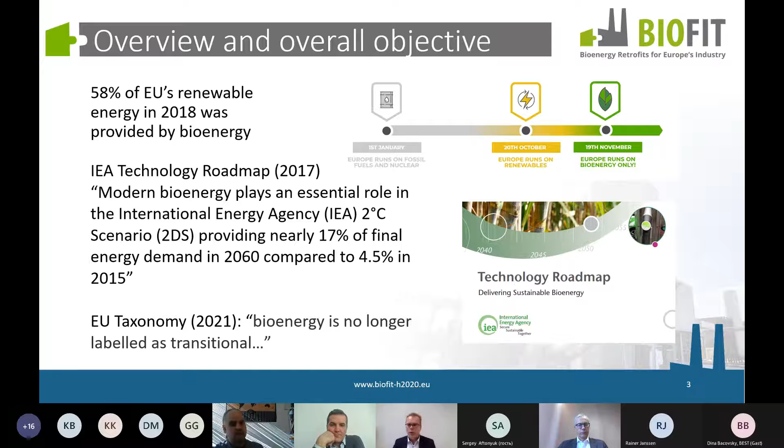Bioenergy retrofitting, the subject of the project, that is a relatively easy way to replace fossil fuels or outdated renewable technologies. And it is, of course, easier often than building greenfield plants, because you can keep part of your plant and you have shorter lead times, lower capital costs, faster implementation, less production time loss, and lower risks.

So our overall objective is to facilitate the introduction of bioenergy retrofitting in five exemplary industries: first generation biofuels, pulp and paper, fossil refineries, fossil-fired power, and combined heat and power. And you will see this division back in our industry sessions. Here we have one on each sector, with the exception of fossil-fired power and combined heat and power, because it turned out that it was more or less very similar. So we combined that one.

The project is nearing its end. We had a 3-year project where we worked together with 14 partners on the facilitation of the bioenergy retrofitting. And you see we had a quite good division across the various European countries.

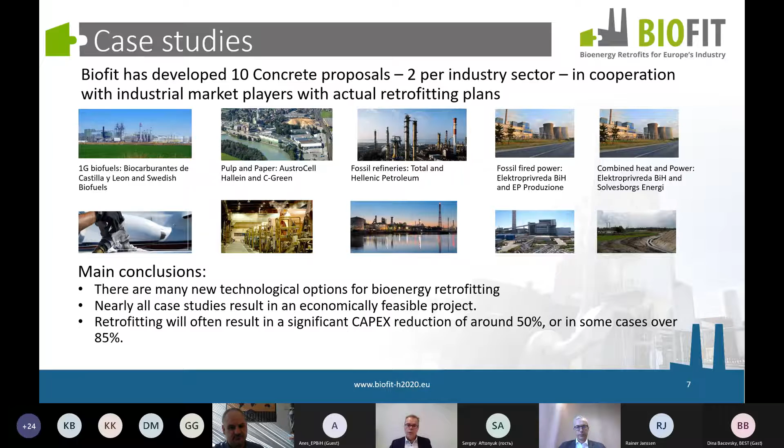Save for the overall conclusions: what we see is that there is really a very big, wide variety of technological options for bioenergy retrofitting, making a spectrum of high-value products in a number of ways, which are often really also quite economically feasible and are really actually implemented. Nearly all the case studies show that you can economically feasibly retrofit, and also that it results in a significant capital expenditure reduction of around 50%, sometimes higher. So you will see these overall conclusions reflected in the industry sessions.

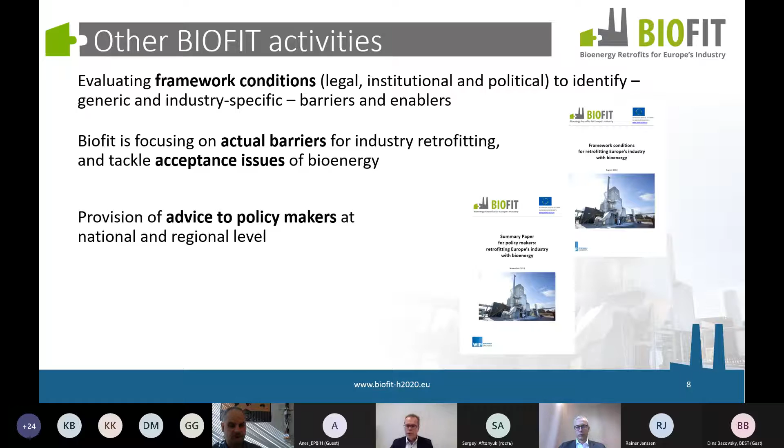We've done other things. We've looked at the framework conditions, looking at actual barriers. We also looked at acceptance of bioenergy, which is an issue which we as industry have to confront, and we will continue to confront it. And of course, we provide advice to policymakers. We will have on Thursday a policy breakfast where we give our policy advice, and we hope to also get input from you all on what it is, so that everybody can learn from that.

Of course, we have supported informed, facilitated dialogues with industry in various ways.

With respect to acceptance, we did a nice survey of 3,200 members of the public in 4 countries. One of the highlights, which I hope comes back in the final conference, was that public acceptance of bioenergy was quite high in all 4 countries. On a scale of 1 to 6, it was between 5 and 6, with not much difference between the countries. It's almost all quite good.

But if you're talking about the companies behind it, acceptance is quite low. So here you see directly that industry has something to do. There is very fertile ground for public acceptance, but it comes down to how we communicate about the technology options and what we can do with our technologies.

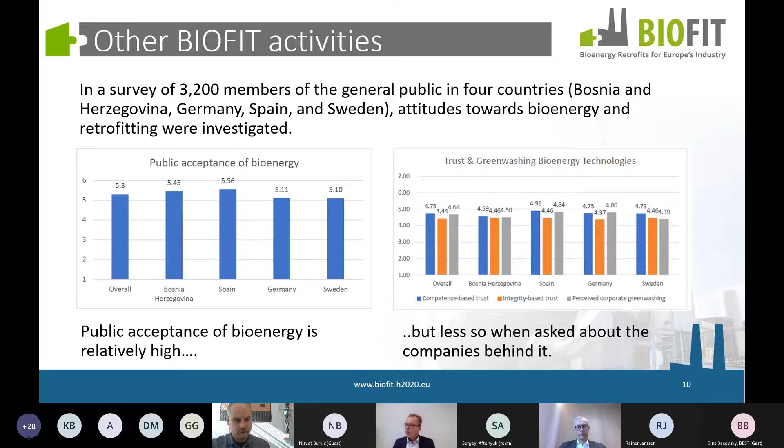This ends my presentation. Today we will go to 2 industry sessions. One is about fossil-fired power and CHP, which will be moderated by Manolis Karampinis of CERTH. I'll give him the word in a few minutes. After that, around 3:15, we will have the session on bioenergy retrofitting in fossil refineries, where I hope to see you back again.

This concludes my introduction. I wish you all a very good conference, and I hope it will be useful and a good learning experience for everybody. Thank you very much.

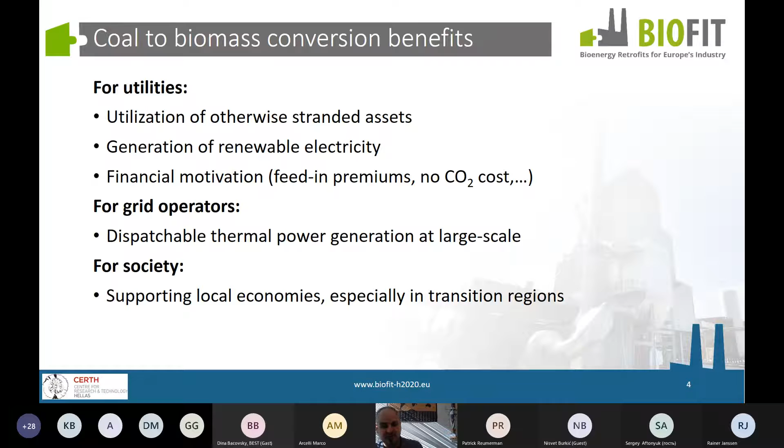When it comes to technology, I don't have a lot of time to go into detail, but at the last stage of the project we mainly found three groups. The first is retention of the typical technology used in large-scale coal combustion, pulverized fuel technology. This has been applied in boilers with a fuel input of up to 1,000 megawatts or even more, with some modifications required.

One of the main modifications in most systems is changing the milling system to switch from coal to a biomass fuel that behaves differently. Sometimes you have to install new burners, and you may need other adaptations in the flue gas cleaning equipment or combustion control. You also have to take care of biomass handling and storage issues.

The fuel used in these conversions is primarily wood pellets, due to large-scale supply issues. When you require biomass volumes for such a big power plant, you need a high energy density fuel, and at the moment this can only be provided by the wood pellet market. There are now several references of plants that have been converted.

Another option that has attracted a lot of attention is conversion to thermally treated wood pellets. Essentially, you have a fuel that is biogenic in origin but pre-treated to resemble coal, so there can be substitution with minimum modifications required.

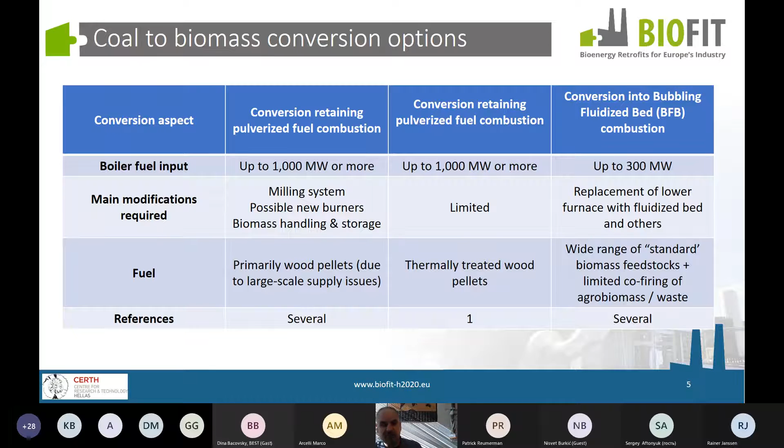The advantage is that you can use a wide range of local and traditional biomass feedstocks, such as forest residues. Perhaps you can also use a certain amount of agrobiomass or waste with minimal processing, so it's a good option for shorter supply chains. There are again several references, but there are many factors a utility has to consider before embarking on a conversion.

I don't have time to go into a lot of detail, but the on-site infrastructure has to be assessed, fuel sourcing options need to be considered, the logistics infrastructure for bringing fuel to the boiler house has to be considered, as well as health and safety aspects and the support scheme that will allow the conversion to take place.

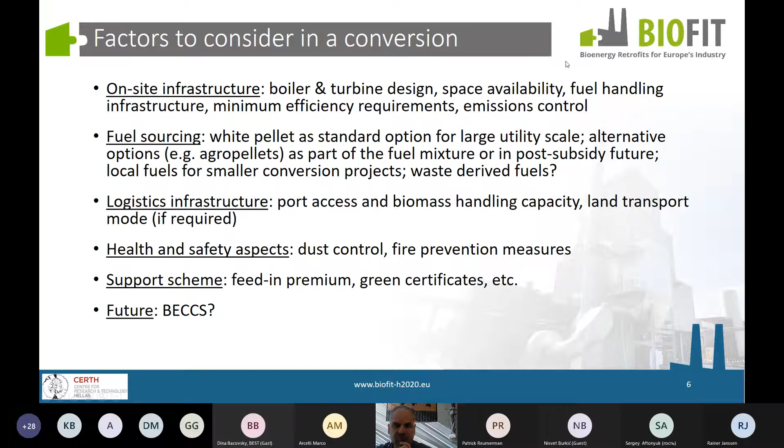In the future, there are other possibilities such as biomass carbon capture and storage that might allow a longer-term perspective for these technologies. At the moment, I think there are a little over 4 gigawatts of active wood pellet conversion projects in Europe.

Most of these projects are in very specific countries. The UK is the clear leader with projects like Drax and Lynemouth, but there is also some capacity in Belgium, Denmark, and the Netherlands, and some smaller ones in Sweden. If you look at combined statistics, it can be estimated that at the EU27 level, about 5% of biopower supply is coming from such converted plants.

It's a little different story in the UK, where about 50% of the bioenergy supply is provided by those converted power plants. Most of these conversions took place around the early 2010s or so, up to 2019, more or less. Some of them have been active for quite a few years already, and most have a quite interesting history, which we don't have time to go into, but for many of them, the biomass use did not happen from 0 to 100% at once, but gradually.

Some years ago, back in November 2019, we had an industry forum in the BioFit project about repowering coal plants to biomass. It was at the time, as Patrick said, ancient history, when we were still allowed to travel. At that meeting, we had identified through a preliminary reading of the draft National Energy Climate Plans that by 2030, more than 80 gigawatts of coal plants were to be decommissioned in Europe, probably even more now with the more advanced coal phase-outs. At the time, there were many discussions about conversion projects considered in Italy, Ireland, Greece, Spain, and probably elsewhere. But since that time, almost nothing happened in developments.

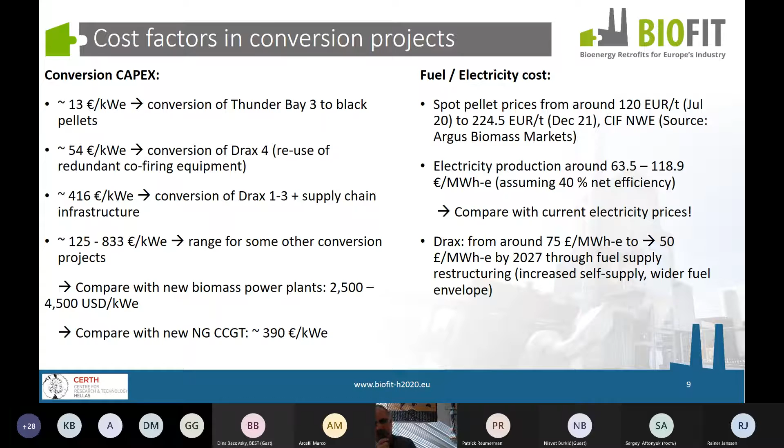And of course, there are different initiatives. For example, Drax has a structural initiative to reduce its electricity cost to up to £50 per megawatt hour by 2027 through increased self-supply, broadening the fuel envelope, and so on. So there are several developments here that might push costs down even lower.

When it comes to the BioFit project, we have been working on 3 case studies on coal to biomass conversions, and they were actually quite interesting and variable sets.

Two of the case studies were located in Bosnia, a country that is still outside of the main European Union policy framework, but affected by it, as it aspires to become a member. And one is in Italy, in Sardinia especially, where it was very interesting to see how a coal to biomass conversion could fit into the framework of an island energy system.

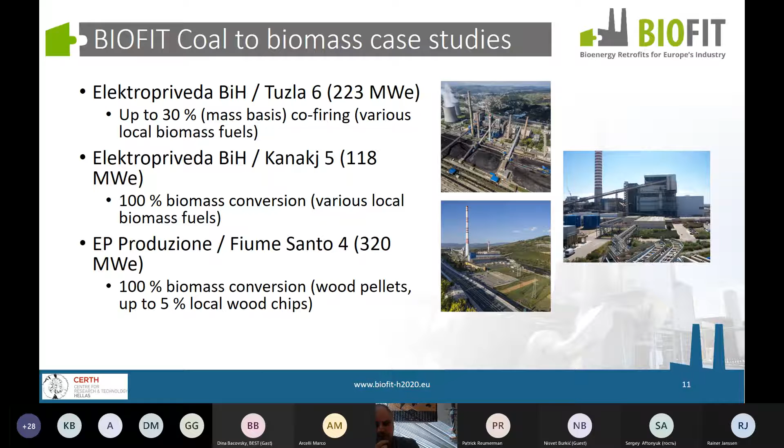I won't say more about this because the case study companies will give their own insights in their presentations. So I will stop here and resume at the end of the session with some policy recommendations we have drafted in the project.

And then I will give the floor to Gilles Gauthier from Bioenergy Europe. He is the market development director, and one of the main persons, I think, to be discussing solid biomass utilization in the organization. So, Gilles, the floor is yours.

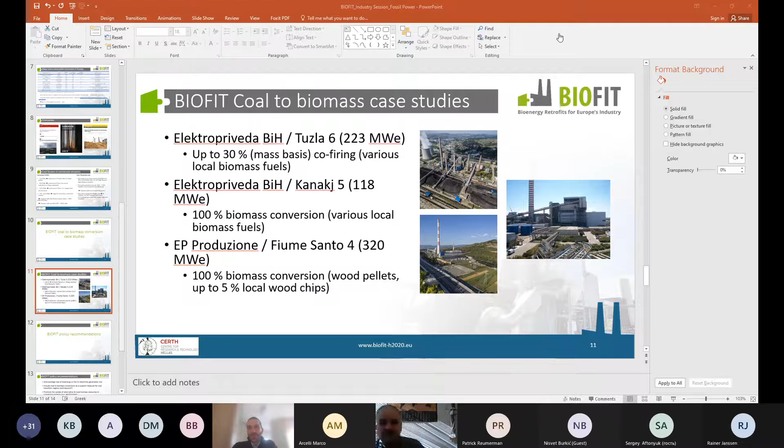Yes, okay, very good. So again, good afternoon, everyone. Indeed, I wish that we would have had the opportunity to meet in person and not remotely like this, but I guess we have to go through this additional wave, hopefully the last one, and I hope that all of you are basically healthy at your own place.

So indeed, my name is Gilles Gauthier. I will give the first part of this presentation, and then my colleague, Daniel Reinemann, will take over for the policy part. So I will take care on my side about, let's say, the market aspects.

So first of all, a few words about Bioenergy Europe. I'll be very quick on that because I know time is limited. We are a team of about 30 persons based in Brussels, and our role is to protect the interests of the European bioenergy sector.

We have existed for more than 30 years now, and we are made of 185 members, which might seem a lot for you, but given all the challenges, including the one that Manolis has spotted with all that controversy that exists against biomass, there is definitely a need for us to get together and to be stronger and stronger.

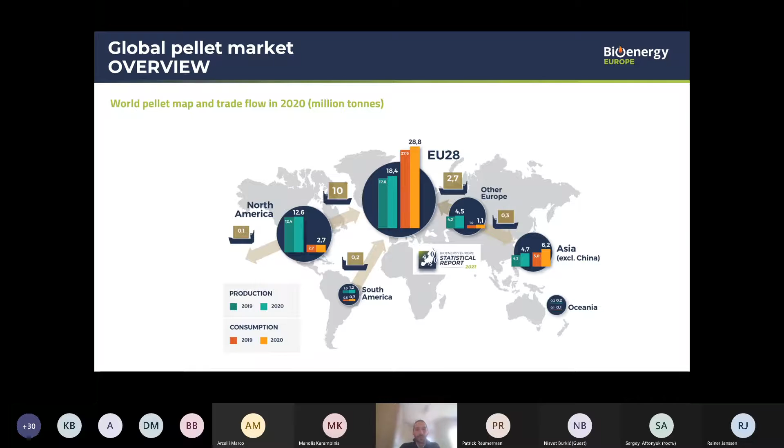So maybe a few words about the UK. Obviously, thanks to Drax, UK is definitely the biggest user. There are some more units coming online, at least one, so this number will even be higher in the future. For the Netherlands, I guess you recall that they used to use pellets, then it stopped for some time because of a stoppage of political support for biomass usage. It has resumed a few years ago and is now continuing to increase, with a limit that will be around 1 million tons in the future.

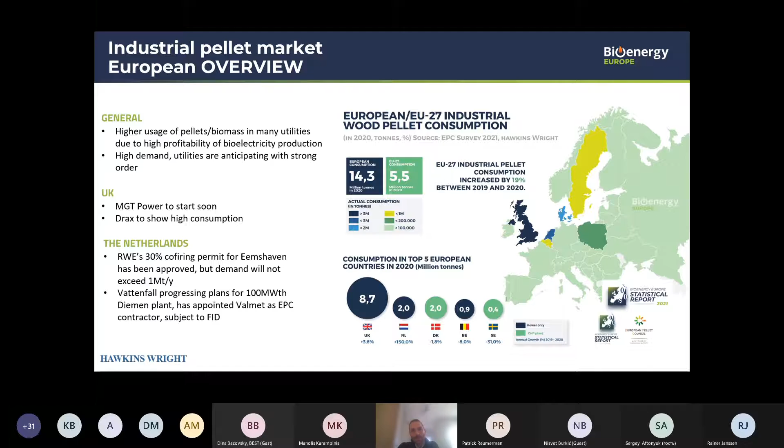And very quickly on the market situation, I have to be very quick, sorry about that. The market was rather quiet in early 2021. And then later in 2021, there has been a very big consumption of industrial pellets from the industrial users for many reasons. One of them being that the electricity price was rather high, making it profitable to run on biomass. So there was an increasing use of wood pellets for power production in most of the utilities, which has created a significant tightening of the market.

So there is now a complete shift in a few months between the situation we had until mid-21 and the situation we have now, where the market is rather tight, and it is definitely reflecting on the price of the biomass.

Just a message to the organizer. I hope it is okay that I would exceed my speaking time by about 2-3 minutes. If it is not the case, let me know and I will try to shorten that.

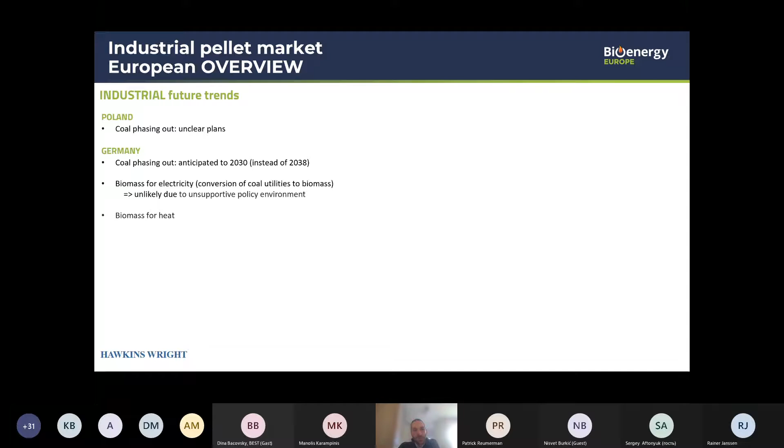So if we look now to the future, we can see two countries where there might be an increase of the usage of wood pellets or woody biomass for heat and electricity production. One of them is Poland, because they've committed to phase out the usage of coal, but their plans are unclear at the moment to me. But Germany is much more likely to use industrial biomass in the future, not in conversion of power plants, from what I understood from different experts, including Hawkins Wright, because there is no favorable policy framework for a conversion to biomass for electricity production, but there is one for biomass for heat.

So I would like to say very quickly a few words about the wood chips market. Part of this information is coming from our member Cleantech Trade. The situation is rather similar to the situation of wood pellets. The first semester of 2021 was very quiet. There was a lot of supply and a reasonable demand. So there was an oversupply of wood chips and rather depressed prices. And within a few months, there was a complete shift.

Indeed, the supply was not as important as in the past, and the demand was much higher, including for the reason I've already mentioned for wood pellets, in the sense that the electricity price was rather high, allowing a larger use of biomass. On top of that, the CO2 price is definitely increasing, which is making it profitable as well. So we have a rather important shift on the market, which is bringing serious tension on the supply, which is then reflecting on the price, which is nearly my last slide.

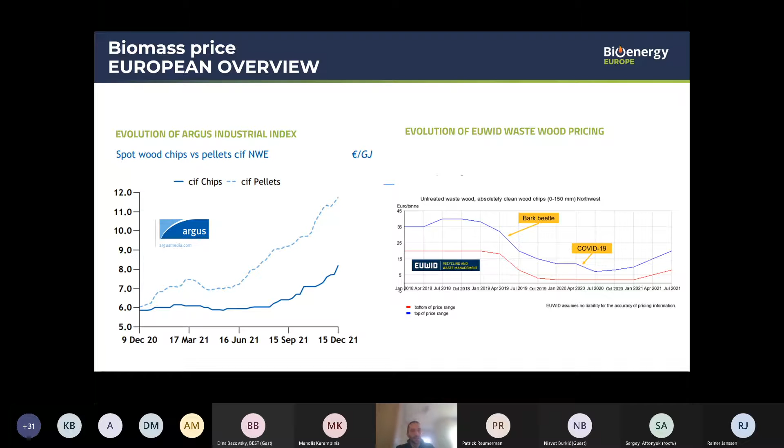So very similar trend to the clean wood pellets and clean wood chips. I would like to conclude with one thing: even though you've got some fluctuation on the biomass price, and unfortunately an increase these days, if you compare it with the fluctuation you can witness on fossil fuels, being natural gas, oil, or electricity, you see that we are much more stable and we will remain much cheaper. I will leave you with this expression from one of the speakers I met recently from EEX. He was saying that wood pellets are basically the stable anchor in the energy complex. So that's the kind of message I like us to put forward. We are definitely cheaper than fossil fuels, and we show also a great stability of price over time, even if at the moment we've got, let's say, a bit of an increase in the price of our biomass for the moment. So with that, sorry for having been a bit longer than expected.

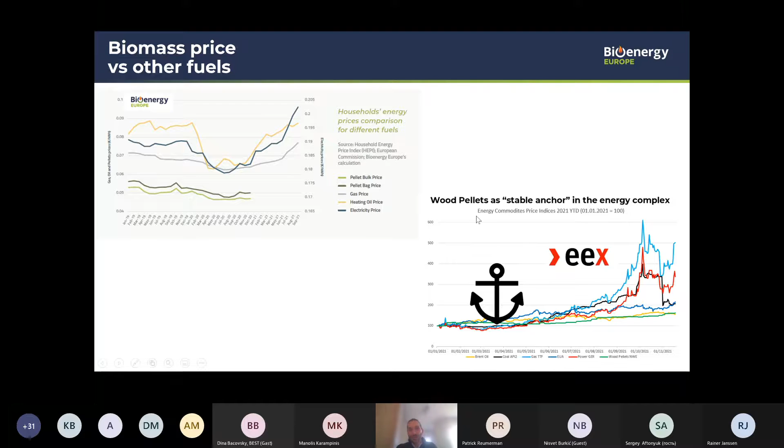So I'm going to go through and present an overview of what the EU legislation is that's impacting the rules for bioenergy facilities today. And then after that, we'll take a quick look at what we can expect looking forward to RED 3, what the legislative framework is going to look like after the Fit for 55 package in 2024, and then I will discuss a little bit on what are some of our views and concerns looking forward.

So looking first at the criteria in the Renewable Energy Directive. These criteria are very important for a number of reasons. In order for biomass to be counting towards renewable energy targets, for sectoral sub-targets, in order for it to receive any kind of public financial support, and to maintain its zero rating in the emission trading scheme, it needs to adhere to all of these criteria.

So these are the three criteria that biomass is required to meet. There are certain sustainability criteria regarding the harvesting and the impact on soil quality to make sure that you're not having negative impacts on the environment. There are also requirements for land use change in forestry, the LULUCF requirements. This is ensuring that for the biomass that's being harvested and used, there is indeed replanting and regrowth happening to ensure that it's remaining carbon neutral, and that you have this regeneration or even growth in the carbon stocks to make sure this is a sustainable solution.

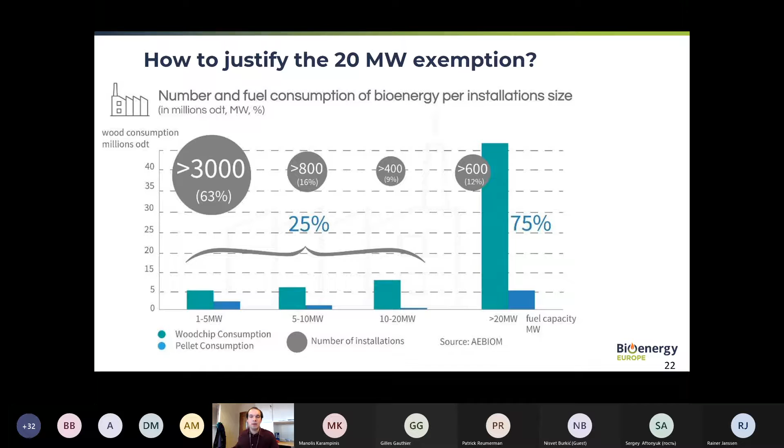Looking forward and talking about the end use criteria, which I think is going to be important for quite a lot of the people listening today, here we're talking about the greenhouse gas emission saving criteria. These criteria are different for operations starting at different times. For transport fuels, the first requirement was that all installations operating prior to the 5th of October 2015 would have a greenhouse gas emission savings criteria of 50% or greater. After that date, it would be increased to 60. And then starting January 1st, 2021, it would be 65%.

For electricity, heating, and cooling producers, the first criteria came into place in 2021, establishing a savings of 70% or greater. Then all new installations going forward in 2026 will have to reach 80%, but that only applies to new installations.

When we're talking about these greenhouse gas savings values, there are two different ways to calculate this: you can either use the actual values or default values. When you calculate this, essentially what it's looking at is what kind of greenhouse gas emissions you have from the extraction or cultivation of these materials. Are you using fossil-powered equipment to do that? When you are harvesting these materials and processing them, is that being done with fossil fuels? Do you have a gas boiler drying the material to prepare it for processing?

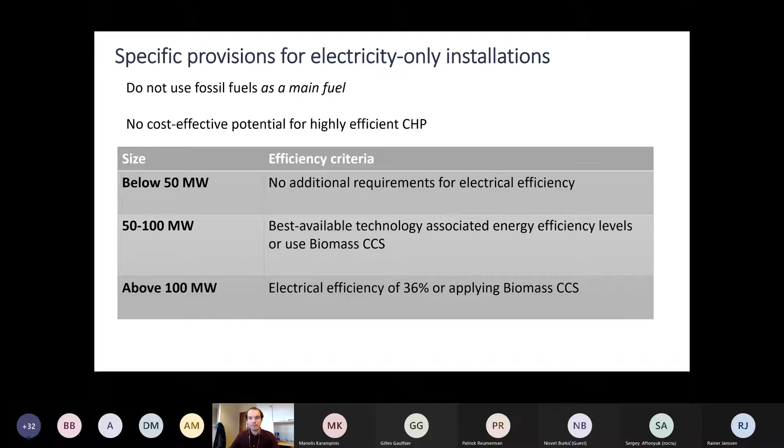So we're generally talking somewhere in the range of 32 to 38%, or the installation is also able to use biomass CCS, in which case it is considered to meet the efficiency criteria. And once you're talking about installations over 100 megawatts, there isn't just the best available technology requirement, but there actually is the electrical efficiency rate of 36 that is required for all installations, or they can also be operating with biomass CCS instead. Those are the two options that exist for them. If you go to the next slide.

However, there have been a few challenges with the implementation of RED 2. There have been quite a few implementing acts that were expected from the Commission, such as the Operational Guideline on Forest Biomass and the recognition of voluntary schemes. Unfortunately, these have both been delayed and have still not yet been released, which has resulted in an adjustment to the monitoring and reporting regulation for the emissions trading scheme.

Initially, the way it was set up is that starting from January 1st, 2022, all member states would need to be going through and demonstrating the sustainability of biomass in order for that zero rating to be maintained in the ETS, for eligibility of support, and to count towards renewable energy targets—all the things I was talking about at the start of this presentation about why the sustainability criteria are so important. However, with this adjustment from the Commission, these criteria are going to be able to be considered fulfilled for the next year, while these voluntary schemes to verify compliance are vetted and approved by the European Commission, and for these implementing acts to go forward to create the framework needed to operationalize RED 2.

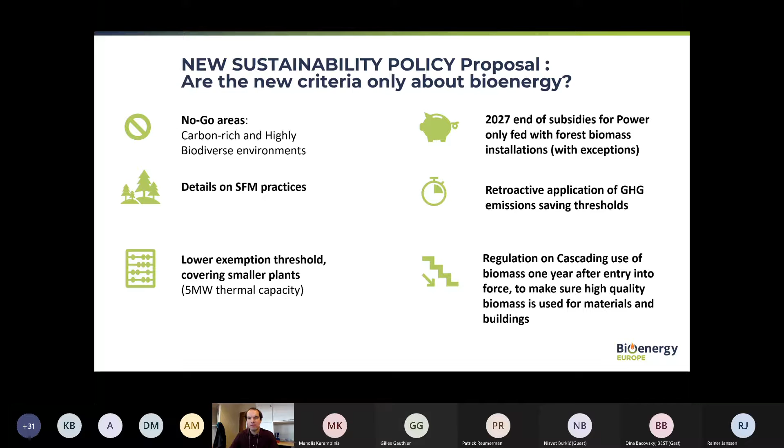So if you go to the next slide, we have a few general recommendations on a lot of these points. We think this lowering of the exemption threshold could definitely be problematic because it could increase the regulatory burden on a lot of these small actors. As I mentioned, right now we have a very effective regulation in place that operates quite efficiently, but if we were to extend it to a bunch of these other actors, that could increase compliance costs, especially given the delays we've seen from the Commission side in recognizing any of the voluntary schemes.

Additionally, on top of that, we think that the retroactivity of the proposed greenhouse gas emission saving criteria could negatively impact the sector by undermining market stability and investor confidence. This could create a framework where biomass isn't considered as secure an investment moving forward. As Manolis was talking about, there are significant capital costs at the beginning, and so we see that this could be an area that could potentially create some challenges.

And then also the institution into legislation of the cascading requirements could create a framework that ends up distorting the market by placing very strict criteria on what is able to be done and how different material needs to be processed, regardless of local factors and local conditions. So we think that those areas could cause some problems in the future.

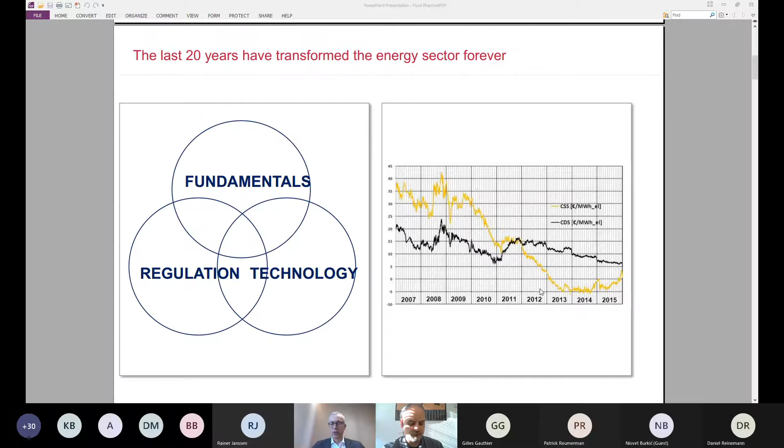If you want to move to the next slide, that actually created a lot of opportunities for newcomers like EPH. EPH is a Czech group founded early in the 2000s that basically grew through acquisitions in this new world where all the legacy utilities wanted to divest their fossil fuel assets as they were moving into more renewable generation.

Through subsequent acquisitions, first of regulated assets when everybody was going merchant looking at increasing power prices, and then from 2013-14 onward, when everybody was concerned about the dynamics of merchant power, we acquired a significant number of assets that today make us the sixth or seventh largest generator of electricity in Europe, with a business that generates about 2 billion euro in EBITDA and about 600 to 700 million of free cash flow every year.

If you want to move to the next one, as we developed this portfolio, driven by the realization that it's not that we're a dirty player like some define us simply because we acquired a lot of fossil fuel assets. Our rationale was that at that time, when everybody was saying by 2040, 40% of generation needs to be renewable, I don't think a lot of people focused on the fact that in that case still 60% had to be fossil.

And if at that time, coal and gas-fired generation was not making money, something had to change, either the regulation or the market, and that happened.

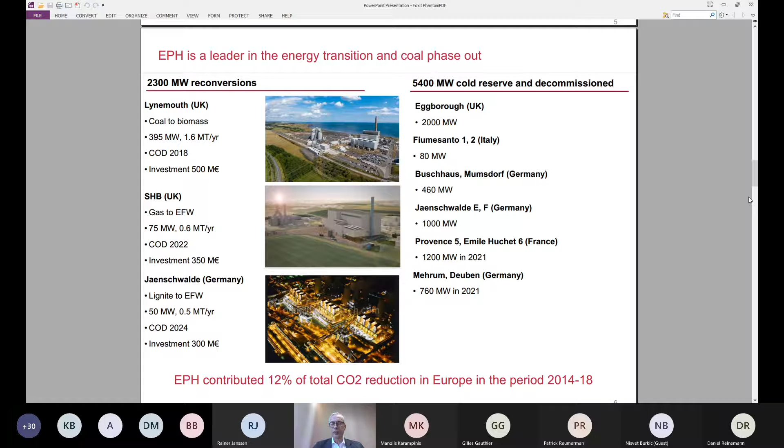So that's what we think is managing the assets responsibly in terms of decarbonization and phasing out of coal. If we can move to the next slide, this is a brief summary of what we have done so far. The first is reconversions: we are reconverting or have reconverted over 2,000 megawatt at Lynemouth, and two power plants, South Humber Bank and Jaenschwalde in Germany, that were reconverted to energy from waste. The second is over 5,000 megawatt that were put in cold reserve or decommissioned, which altogether contributed to 12% of the total CO2 reduction in Europe in the period 2014 to 2018.

On top of that, we are also investing in new renewables and converting existing plants into something more efficient. Our existing gas-fired generation is also being reconverted to higher efficiency, from the high 40s and low 50% efficiency to the current 60% and more efficiency with H-class technology. We invested over 1 billion in the last 5 years, and 1 billion will be invested in the next 3 to bring this decarbonization plan forward over the next decade.

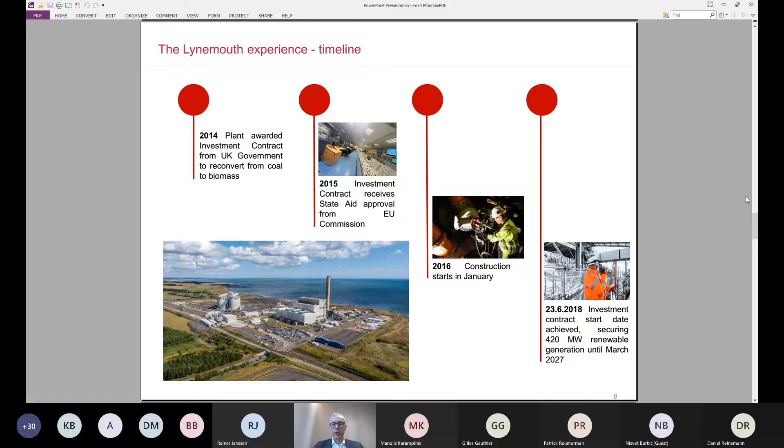Which brings us to our direct experience in biomass and reconversion, which is at the core of what Manolis was describing before. Lynemouth is the first project. It came into operation as a coal-fired plant for an aluminum smelter in 1972. In 2014, the plant was awarded an investment contract from the UK government to reconvert from coal to biomass through an extensive capex plan of over £300 million. In 2015, this investment contract received state aid approval. It took more than 2 years between regulatory and permitting to then start construction in January 2016, which was completed in just over 2 years, securing 420 megawatt gross renewable generation that will run until March 2027.

This was one of the largest Drax-type plants converted in the EU at the time and in the UK, with 420 megawatt gross and 390 net capacity exported to the grid, saving approximately 1.5 million tons of CO2 emissions compared to the previous coal operation. The investment tackled both the power plant and biomass storage capacity, at the Port of Tyne for 75,000 tons and 50,000 tons at the station, plus all the logistics of 1.8 million tons of pellets coming mainly from Canada and the USA through the direct sea and rail infrastructure network linking the port to the power station. That maintained all 150 jobs we had at the power plant before converting it.

That's another big claim we make about biomass as a secure renewable energy in the sustainable architecture the EU is developing: the fact that we can support a similar level of employment as we had with power generation from coal, as opposed to wind, solar, battery storage, or other technologies that have really low employment.

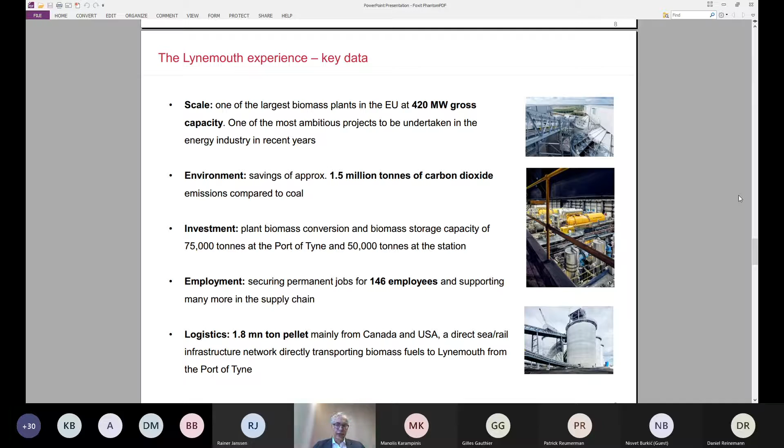If we move to the next one, we move to the other projects. Lynemouth is completed, it's running well, and we're very happy with that. So we said, why can't we replicate it in other power plants in our portfolio? The choice fell onto Fiumesanto, a 600 megawatt coal plant in Sardinia, in northern Sardinia, with a reliability must-run contract until the end of 2024, so basically 2025, and a planned coal phase-out thereafter.

So it's one of the two plants on the island where the system operator certified that there is a need for 600 megawatts of baseload capacity on the island to guarantee system reliability. So we took it responsibly and said, well, we have an idea, we would like to convert it to biomass because that's the fastest way you can convert it, between permitting and the actual physical work at the plant.

However, there is also a strong lobby to bring gas to the island. Today there is no significant gas demand, and so there is a big gas project to build a main trunk line from the north to the south, basically changing the LPG gas used today to methane. We said, of course, we can also look at that solution, but it will take longer. From a regulatory perspective, we need somebody who guarantees that by the time we do the reconversion, the gas will be there. So we think that from a regulatory standpoint, it's a little more complicated, but still doable.

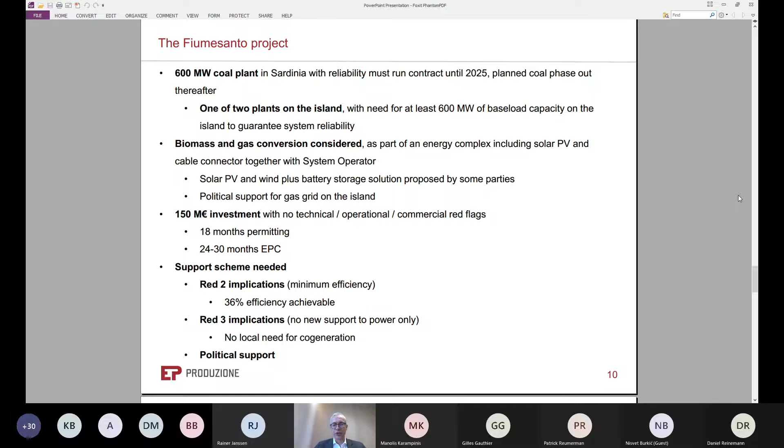And if you go to the next one, it's mainly on the fuel handling side — both the ship offloading, the coal tower, and new biomass silos and internal conveyor system that will bring it from the silos to Unit 4 of the power plant being reconverted. Altogether, from a technology standpoint, very simple activities we can do, and commercially quite simple too, because we can source the pellets from the general market.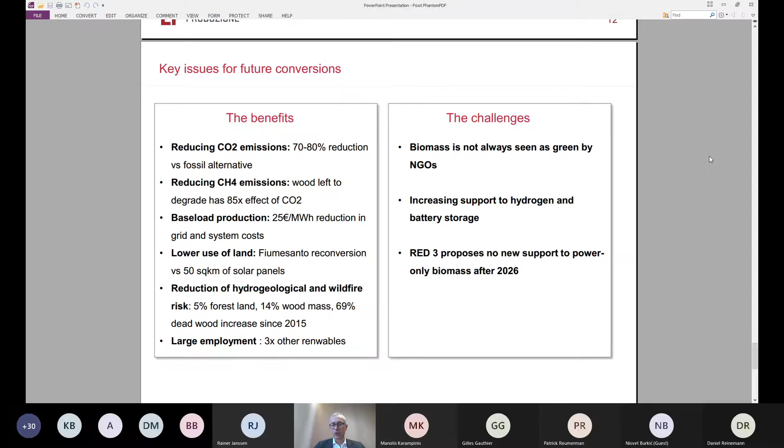And the last one is the large employment that we saw. However, the challenges were already described. Today, biomass is not always seen as green by some NGOs and some political parties. There is an increase in support to hydrogen and battery storage, which is seen as an alternative solution. And the RED III proposes no new support to power-only biomass after 2026.

So if we move to the next slide, we see the conclusion: unless we act together and convince the European Union to tweak RED III and the related local regulation to enable power-only generation, or at least to have the exclusion that if you cannot do cogeneration locally because it's warm weather or there is no industrial activity that justifies the use of cogeneration, we see that coal to biomass conversions and new biomass plants in Europe probably will not have a future in the European Union.

So I think that this is a call to everybody to speak up at the European level so that we can support this type of projects also in the future. Thank you.

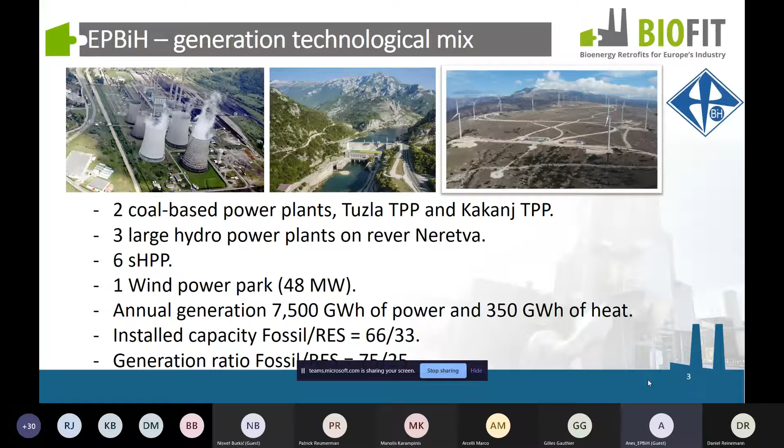Installed capacity of fossils versus renewable energy sources is at the moment two-thirds in favor of fossils. So we are in a process of energy transition to renewable energy sources.

Some key energy indicators of the company: we burn about 5 million tons of coal a year. Average net efficiency of our thermal power plants, not accounting cogeneration mode, only condensing mode, is 31. Annual CO2 emissions are 5 million tons a year. The average CO2 emission factor from our thermal power stations is 1,000 kilograms of CO2 per megawatt hour, while the average net emission rate, including renewable energy power accepted from some smaller qualified producers, is about 670 kilograms of CO2 per megawatt hour.

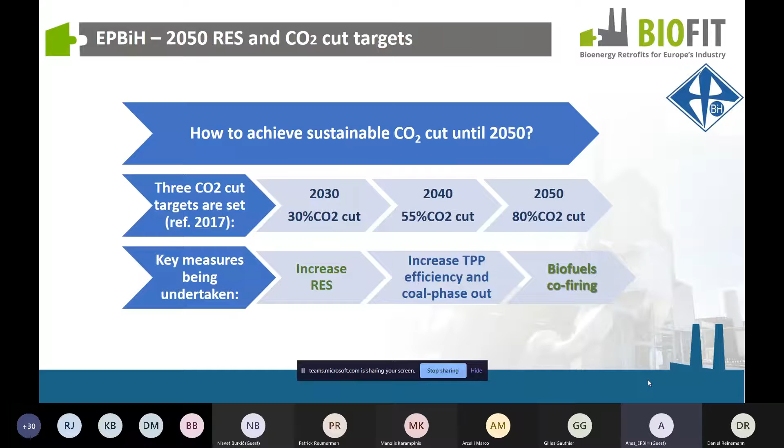Three key measures to achieve those targets: increase of renewable energy sources, increase net efficiency of our thermal power stations, and as a third pillar of the measures is biofuels use instead of coal in our power plants. So in some basic scenario, this is the transformation of our technological mix until 2050, where we can see a trend of transformation from dominant fossil production to dominant renewable energy sources until 2050.

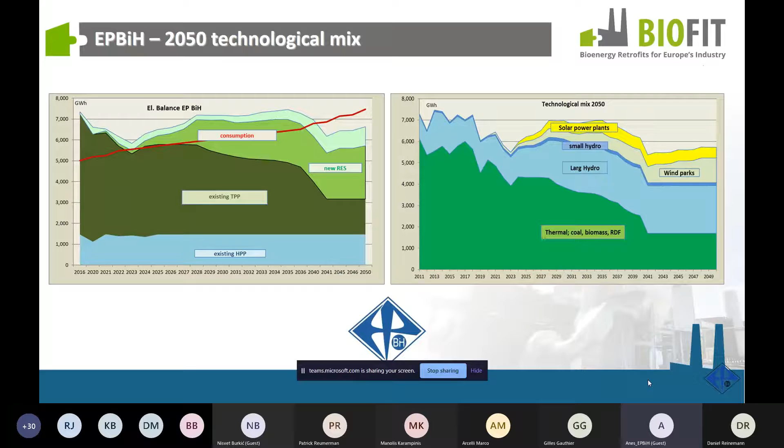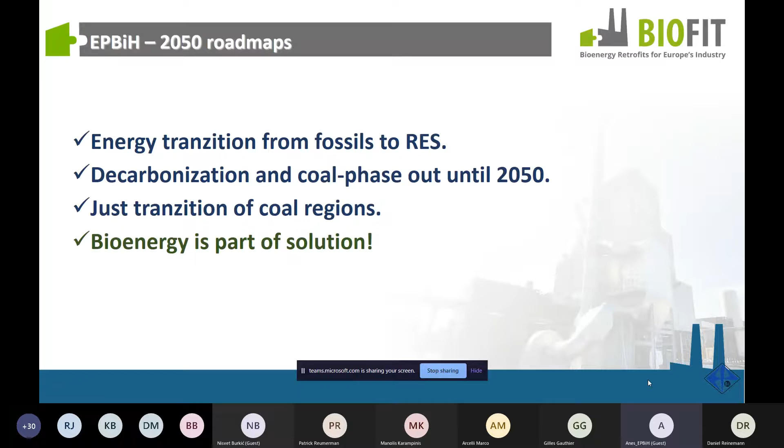So we have a program of transition of our coal regions with decreasing of people employed in the coal mines, with decreasing of coal production and supply to our power plants, and the development of some green jobs on our coal mines, which is at the moment related to the installation of photovoltaic power plants and also bioenergy crops plantations. So as our commitment, I can finish this part of the presentation: we see bioenergy as a part of the solution for decarbonization of our generation portfolio.

So I will say now something about our previous, ongoing, and future bioenergy activities. When we talk about bioenergy activities, we first need to start from the logistics and the types of biomass that are to be used in our power plants. So we started first from the waste woody biomass option. Then we continued our activities with short rotation coppice and other bioenergy crops plantations. And also recently, we started some activities on the development and implementation of waste to energy options, meaning introducing some fuels from waste in combination with other fuels for our power plants.

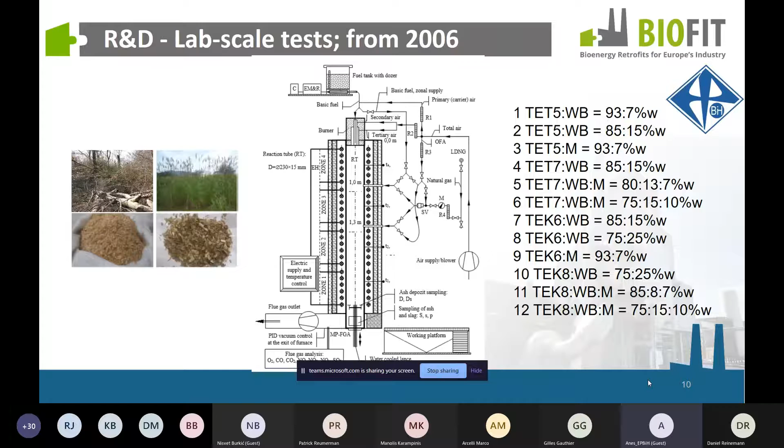We also 15 years ago started with research into possibilities of biomass co-firing in our power plants. So we investigated different combinations of our coals with different types of biomass, waste woody biomass, and also bioenergy crops in different ratios. We first started that on lab scale facilities, and then 5 years later we started with the first biomass co-firing trial run in our large power plant Kakanj, where we started to use 5 to 7% of waste woody biomass in combination with the coal without any adaptation of the equipment on the unit.

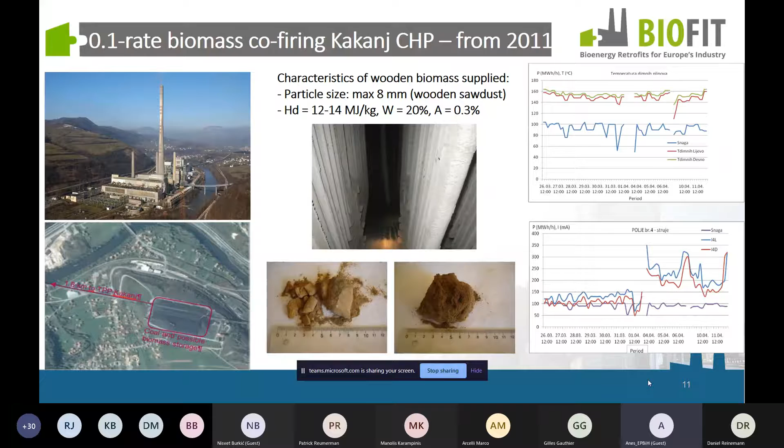So it is actually simple mixing of the waste woody biomass, chips and sawdust, with the coal on the coal depot, and then transportation by belt conveyors to the coal bunkers and introducing through the milling burner line into the boiler. We noticed a list of synergy effects of use of this type of biomass in combination with the coal. The coal that we use is a low-rank coal, so wooden biomass even improves the characteristics of the fuel in our power plant.

Then in 2020, last year, after detailed analysis, we started with the plantation of bioenergy crops on former land of some of our coal mines. So we already established some experimental test plantations, we now supervise the growth of the plants, and this year we are going to multiply these test plantations by 15 new hectares of willow. This is the type of short rotation coppice that we planted so far, and we have a possibility to establish more than 1,000 hectares of former coal mine land with these plantations, and to use our own grown biomass for biomass co-firing in our power plants.

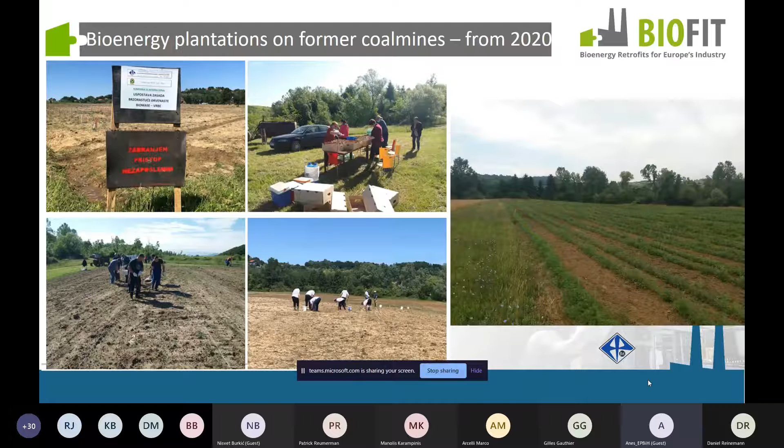And as I said, we also started with some research into use of RDF in combination with coal and biomass in our coal-based power plants, and we have a program of implementation of this project for our 2 power units in Tuzla and Kakanj.

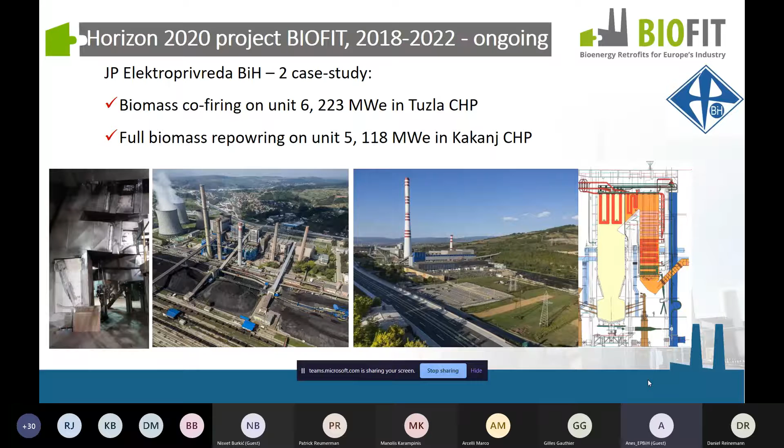And finally, we come to the BIOFIT studies. Within the BIOFIT project, we had the opportunity to offer and investigate 2 of our case studies. One is in Tuzla power plant on unit 6, a cogeneration unit of 223 megawatts electric and 220 megawatts thermal in cogeneration mode, which will use 15% biomass in operation. And the second project is full biomass repowering of unit 5 in the combined heat and power station Kakanj.

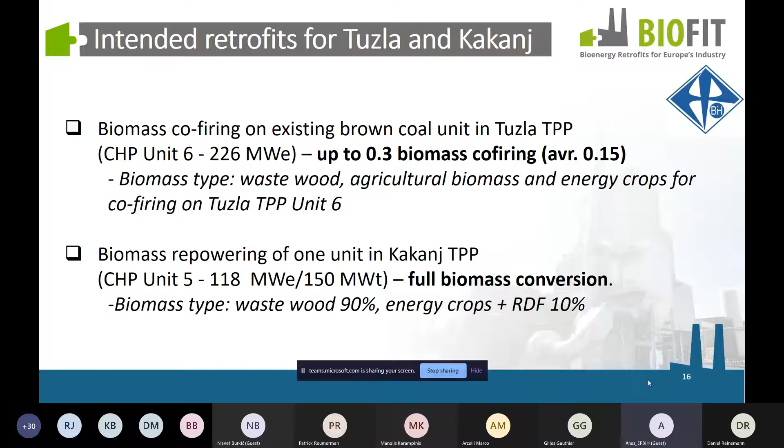So we first started with the target of 0.3 biomass co-firing on Unit 6, but we established together with the CERTH and Manolis team the calculation for transformation of the combustion for the biomass co-firing at average 0.15 biomass co-firing, where we would use different biomass types as waste wood, agricultural biomass, and energy crops. The second project in Kakanj power station considers full biomass conversion, where we would use waste wood at 90%, while the rest of 10% would be difficult or hard to manage fuels such as energy crops, RDF, or even coal.

This Unit 6, we modernized in 2013, increasing the net efficiency of the unit. We have 2 rows of 12 burners, low NOx burners, and OFA systems installed, and the coal used on these units has a lower heating value between 14 and 16 megajoules per kilogram.

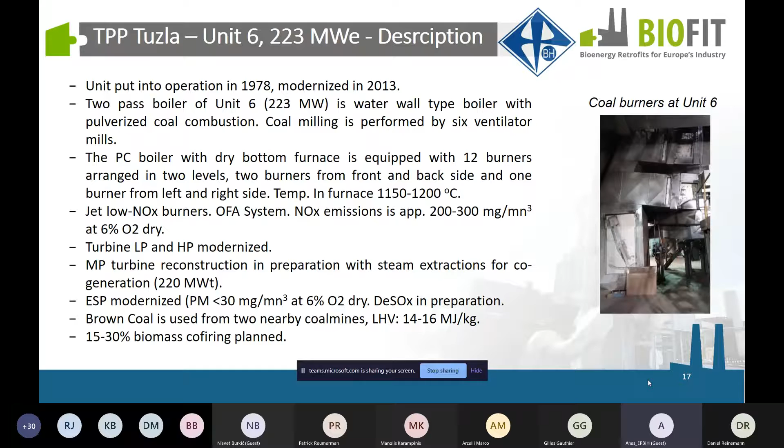We consider using biomass co-firing through dedicated biomass mills and biomass burners that will be installed on the existing boiler of Unit 6, and of course the storage system would be installed near the coal depot of this unit. So some of the next steps for this unit include further investigation of the logistics for the collection of the necessary amounts of biomass, which will be in the range between 6 and 14 megajoules per kilogram.

We already started with a trial run of biomass co-firing on this unit. At the end of last year, we started with 10% biomass co-firing, and preliminary results are very good. We have no problems with co-firing 10% of biomass on this unit without any modification of the equipment, and we will continue this trial run this month.

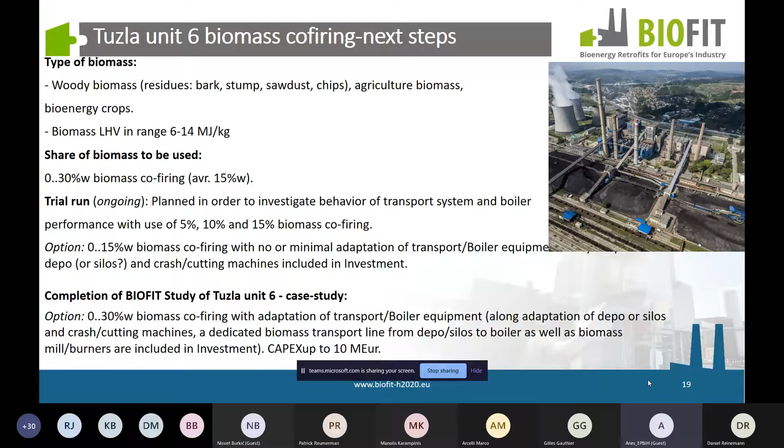Also, because the Biofit study for Tuzla Unit 6 is in the final stage of completion, we plan to finish this study - I think Manolis can confirm - until end of this year or beginning of next month, end of this month or in the beginning of the next month. And the capex estimated in the study, necessary for providing continuous biomass co-firing of 15%, is about 10 million euros.

When we talk about this Unit 5 in Kakanj power station, it is a specific combustion system installed on this unit. It is actually a slag tap boiler furnace with some increased temperature in the furnace, but this unit is also modernized, and we have installed 12 low NOx coal burners placed in 2 rows. Boiler efficiency is very high for this type of unit. The low and high pressure turbines are modernized, and a hybrid ESP bag dust filter enables PM emission below 10 milligrams per normal cubic meter. We use so-called brown coal on this unit.

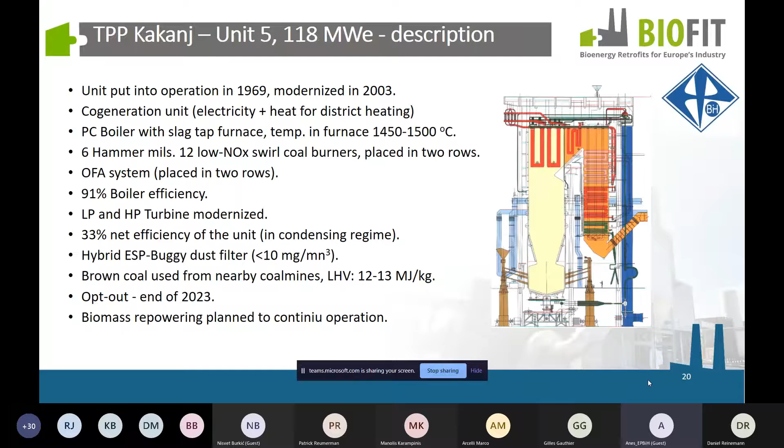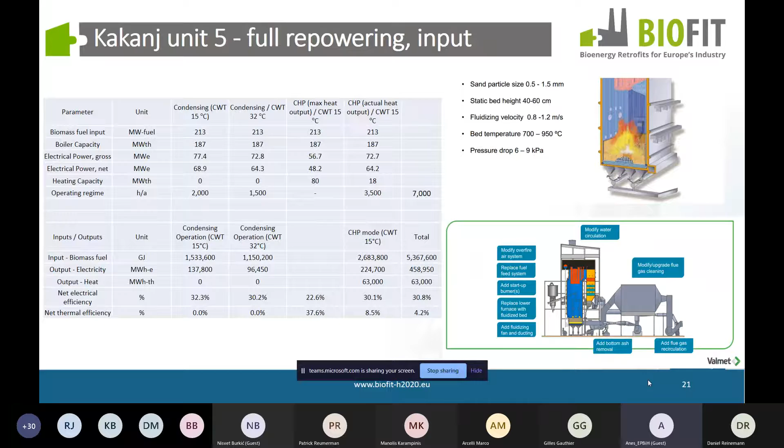This unit is actually envisaged for opt-out. It can operate until end of 2023 on coal, and then we need to actually adjust it to the Industrial Emission Directive or replace the fuel on this unit. That's why we started this project. What is envisaged within this project is a replacement of the furnace with a bubbling fluidized bed furnace, and the estimated capex is about 30 million euros.

We also started with a trial run on this unit with the possibility to test 10, 20, and 30% of biomass in the fuel mix for this unit. This process is in preparation, and we plan to finish this trial run by the end of March. And I hope we will have Manolis, you on site when we run these tests in Kakanj power station.

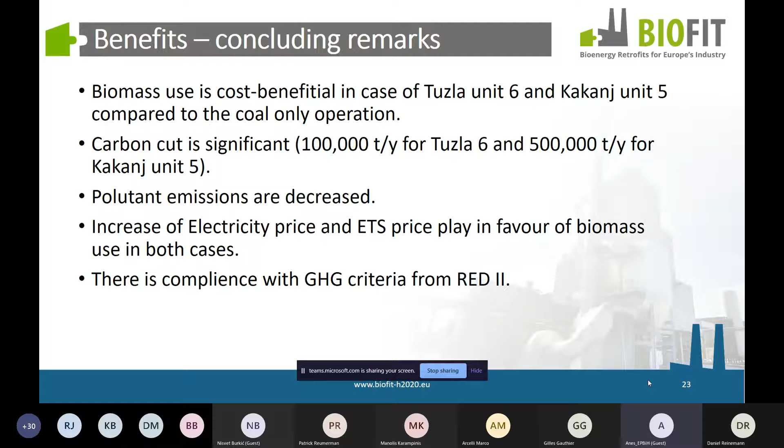So to conclude with a list of benefits of launching these 2 projects: these 2 projects will significantly reduce CO2 emissions from power stations of Elektroprivreda. Both projects are cost beneficial - that's a preliminary result, we will see the final result soon. Pollutant emissions are further decreased. We also have some trends of electricity price and ETS price which actually play in favor of launching these two projects. And there is compliance of both projects with greenhouse gas criteria from RED II.

When we talk about some challenges and risks, I should emphasize that insufficient biomass quantities that can be mobilized to ensure operation of the units can be a real challenge. Then we have risks from a regulatory point of view related to RED II, where we couldn't recognize biomass co-firing as renewable energy in RED II, because in the case of Tuzla 6, biomass is not actually the main fuel. For Kakanj Unit 5, it is a different situation - we can recognize it as a renewable project under RED II because we have full repowering by biomass.

The minimum net efficiency required by RED II is 36% net efficiency, while we have a bit lower net efficiency on both unit 6 and unit 5. So we need either to ask for some sort of derogation in Bosnian RED II, or to launch a project of replacement or further modernization of the turbine set to achieve net efficiency of 36%.

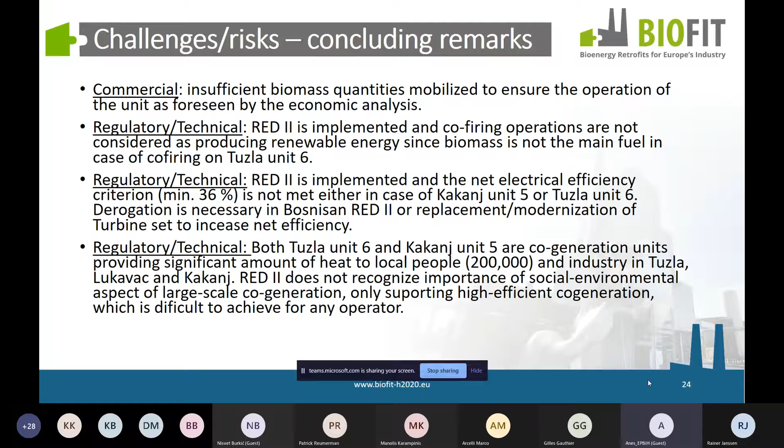We have a situation where from those two units we deliver heat to more than 200,000 people living in Tuzla, Lukavac and Kakanj, plus delivery of heat from cogeneration from those two units to industry in those three cities, and we actually cannot be supported by RED II definitions for such projects.

Thank you for your attention.

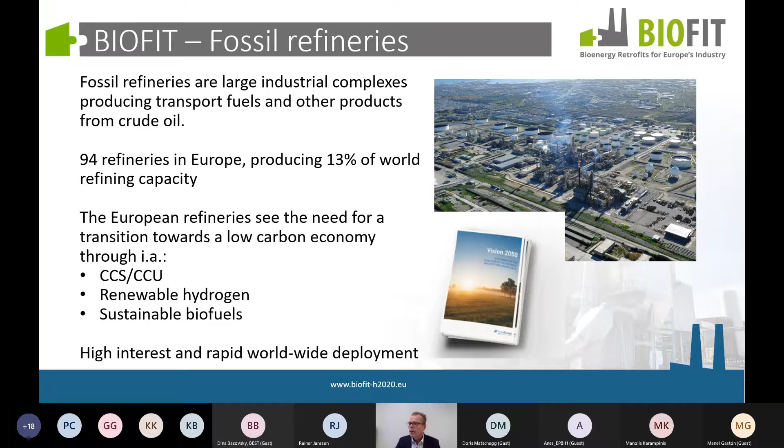You can put in vegetable oils and then hydrotreat them to get fuels with biocomponents, or you can put in pyrolysis oil, which can also be used to make renewable fuels.

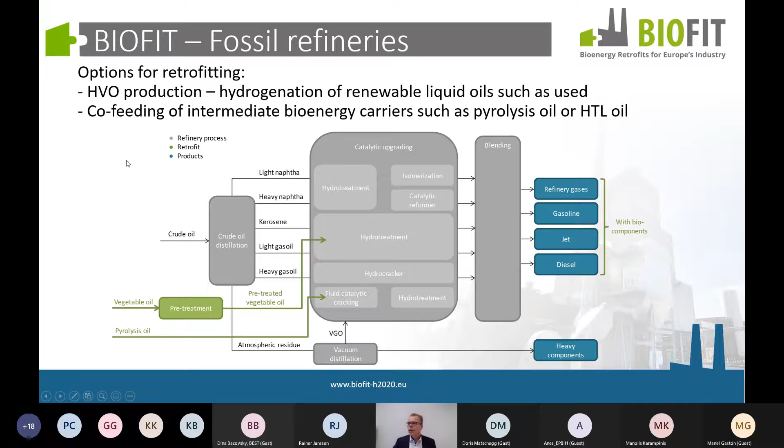4.5 million tons per year of capacity is planned. In total, in the world, we're talking about, I think, 5 times as much in the next 5 years. So it's going quite fast, especially for HVO and HEFA.

For the other option that we're discussing, that's pyrolysis oil. There, the first full-scale project is set to start with the pyrolysis plant of Preem. The Pyrocell pyrolysis plant in Sweden has come online very recently, and the pyrolysis oil will be used in the Lysekil refinery of Preem.

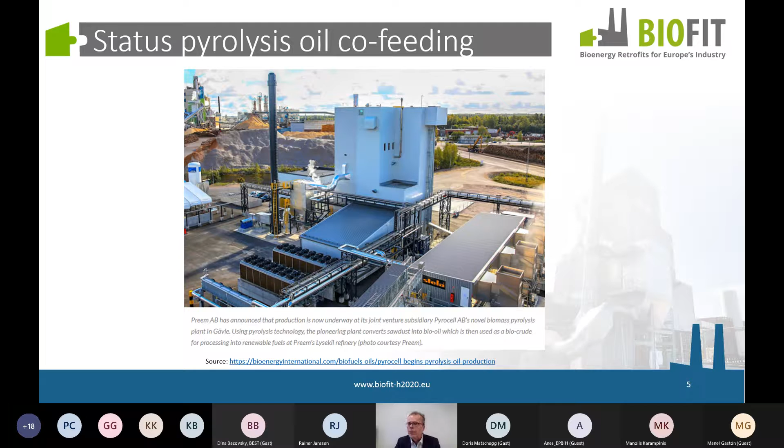What will we do in our little bit more than 1.5 hours? We have 3 speakers. From NREL, Mr. Michael Talmadge has written an article on techno-economic analysis of co-processing of fast pyrolysis oil. We're very happy that he will be here to present his work. We will also present the work of 2 case studies. The first is the integration of HVO production in the Thessaloniki refinery of Hellenic Petroleum, presented by Evantia Nanaki and Dimitris Kourkompas. And we have done a study on pyrolysis co-feeding of green transport fuels in one of the Total Energies refineries.

I don't think it's good if I take more of the limited time that we have, and I would like to ask Michael Talmadge to start with his presentation.

Michael, are you there? I am here, yes. Hello, Michael, very good to see you live, in person. Good morning, Patrick, and everyone online here. Thank you for having me. Okay, I'll stop sharing so you can get the floor.

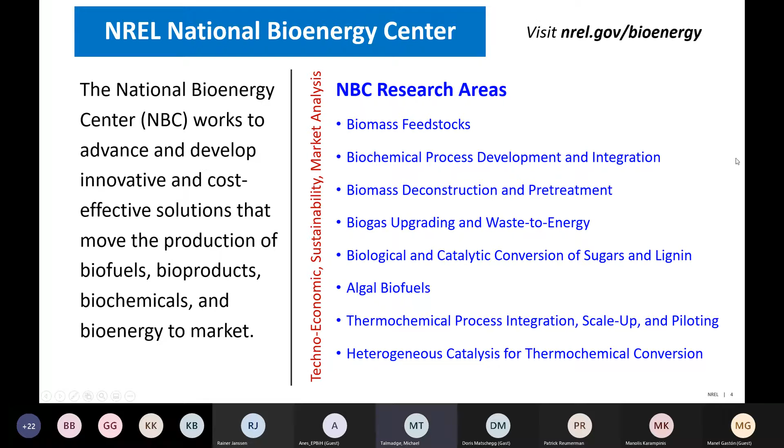The purpose of our refinery analysis at NREL is to look at two sides of this coin. First, to leverage all of the existing refining and processing infrastructure that's out there. If we're just looking at the FCC, 220 billion gallons is the number we last updated, and that's a lot of volume when we're considering, in the U.S. context, numbers like 35 billion gallons of SAF. So just to put in context how much refining capacity is out there, we're really trying to utilize that to reduce the cost of biofuels.

What we're trying to do with refinery impact analysis is complement the core techno-economic analysis we're doing on converting biomass to liquid fuels, which quantifies the production cost. On the refinery impact analysis side, we're trying to see things from the refiner's perspective and really value the liquid intermediate propositions being offered by the emerging biomass conversion technologies. So our focus here is understanding the value of these materials.

Then what we have is a difference: the difference between the value the refiner would pay for this product and what it costs to produce it is simply the profit opportunity. So it's important to understand both - what does it take to make things from the biomass, but also what are they worth.

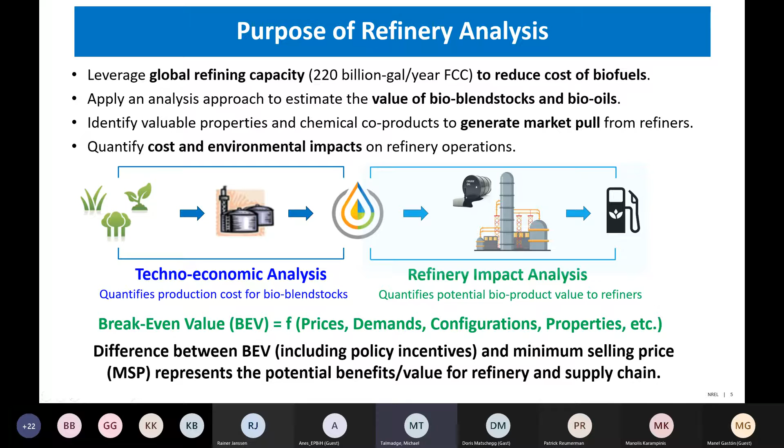Just a quick history of refinery analysis. The National Advanced Biofuels Consortium was something our group at NREL participated in fairly actively starting around 2010. From an analysis standpoint, we really just scratched the surface, looking at some of these bio-intermediates offered by pyrolysis and hydrothermal liquefaction, beginning property comparisons between those and fossil-derived streams in the refinery. We then started doing some basic blending calculations, seeing how these upgraded intermediates can blend into the finished product fuels.

The bulk of what we're going to talk about today is really derived from this NREL-Petrobras relationship, where we got some excellent data from Petrobras's pilot units down in Brazil, and we built a pretty comprehensive techno-economic analysis around that data set.

Since that analysis, we have come a long way in terms of utilizing different tools. With our partners at Pacific Northwest National Lab and Argonne National Laboratory, we've utilized some of Aspen's tools, specifically the PIMS refinery optimization model, to do more comprehensive analysis and really try to look at risk for the refineries. We'll talk a lot about economic risk associated with co-processing opportunities here.

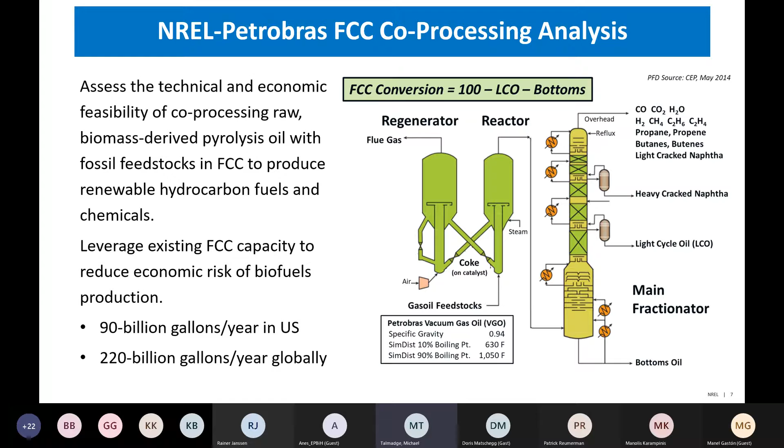So what did we do in this Petrobras work? Petrobras has this really excellent unit to which they fed both traditional fossil gas oils with up to 20% pyrolysis oil. The pyrolysis oils came from two different producers, both Ensyn and BTG oils were used in these experiments, and essentially the properties of the two oils were extremely similar. I realize there are very likely details between the two technologies that make a difference in terms of quality of the bio oils, but on paper they were very similar.

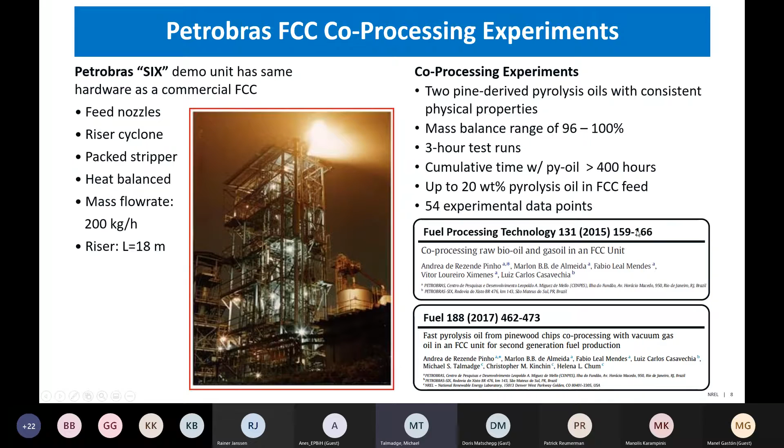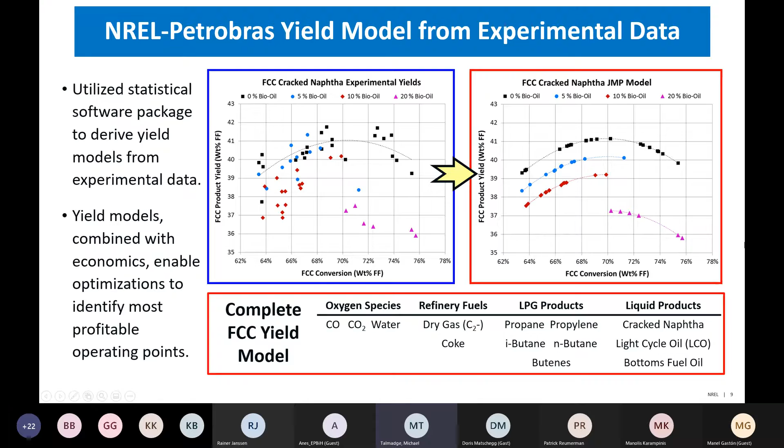We're at the point now where we're trying to get this data set in a way that we can utilize it for things like optimizations. So I mentioned we generated one of those equations for each one of those major components for the FCC, and of course we validated them.

All right, also in the scope of this techno-economic analysis was some product upgrading and finishing unit operations downstream of the FCC. So the FCC, we talked a little bit about how we get that full slate of different materials off of the FCC, and then subsequently in a refining environment, much of them, for example, the butenes and isobutanes, are converted to a high-octane gasoline product through this process, alkylation.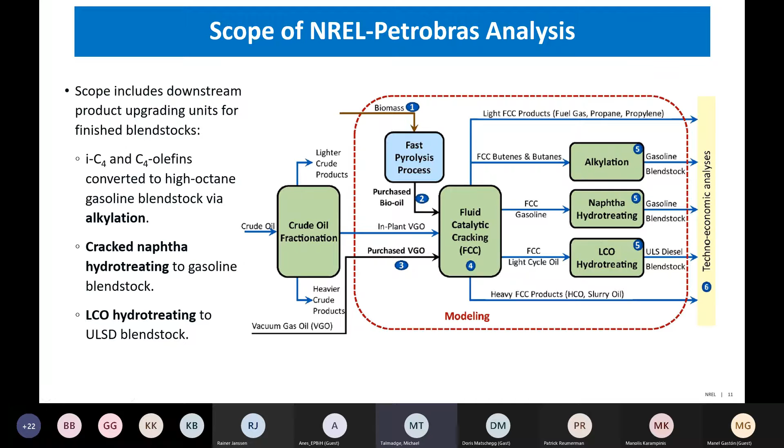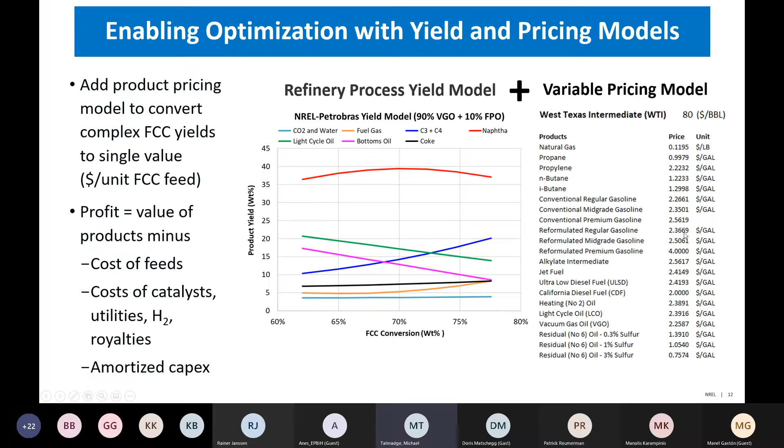And what we do is we take this mathematically based model and we kind of combine it with economics. So we've worked a long time on trying to understand how the economics associated with bio-oil processing, which are largely driven by the crude oil markets, impact the economics of our potential biofuels pathways. Okay, so once we have this comprehensive pricing framework that incorporates with our yield model, we can do good stuff.

All right, and so I'm going to start with an illustrative example just to lay out how I'm going to discuss these results. But the first thing that we notice is our cost to produce bio-oil is really not a function of the crude markets, right? But the value of the products that we make from co-processing bio-oils very much are. So when a refiner accepts a feedstock and puts it in their refinery, the value of that material is a function of what they get out, right?

So while our production cost for this biointermediate that we want to feed to the refinery is not a function of WTI, or West Texas Intermediate, or any benchmark crude, our value is. Okay, so if we think about ourselves being in the driver's seat of the refinery, when crude prices are high, I have a really good potential to make some money off of putting this biointermediate in my refinery because the products are valued high. When crude prices are low, it's a very different scenario.

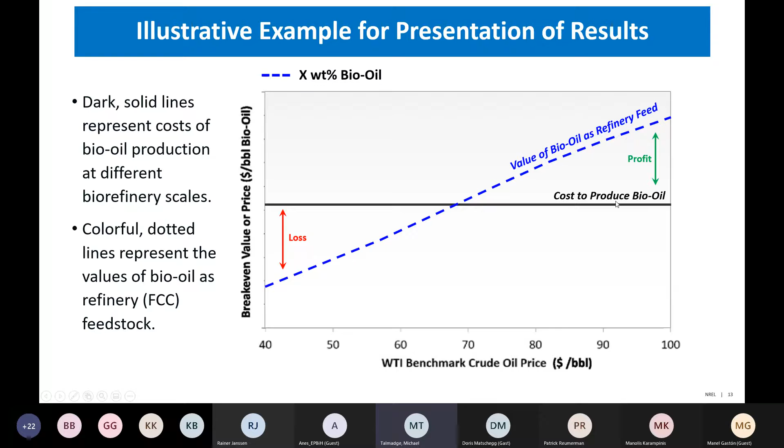And this whole phenomenon presents economic risk for the refining industry as we are trying to engage them in contributing to biofuels production. This is certainly a challenge that we have to understand. Okay, I hope that makes sense. Now I'm going to jump into some of the actual results.

Oh, I forgot I had animation here, so sorry about that.

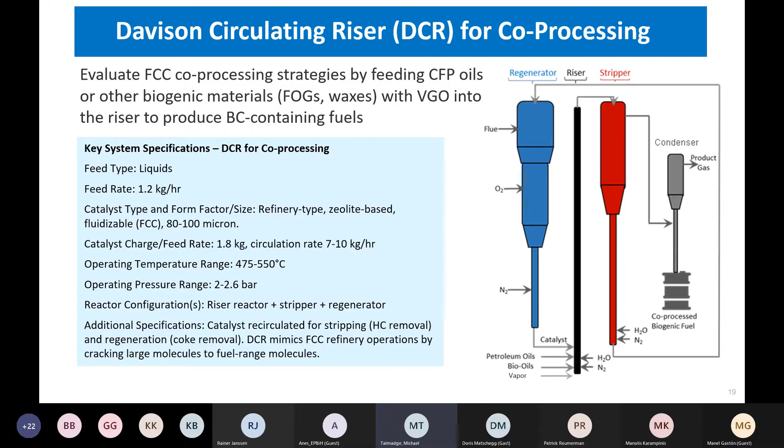And really our future goal is to figure out how to utilize all this existing infrastructure out there. So we've got all these refineries scattered throughout the US and certainly the world, and all those refineries are connected through these pipeline networks too, which are very, very valuable for us if we can figure out how to utilize them effectively.

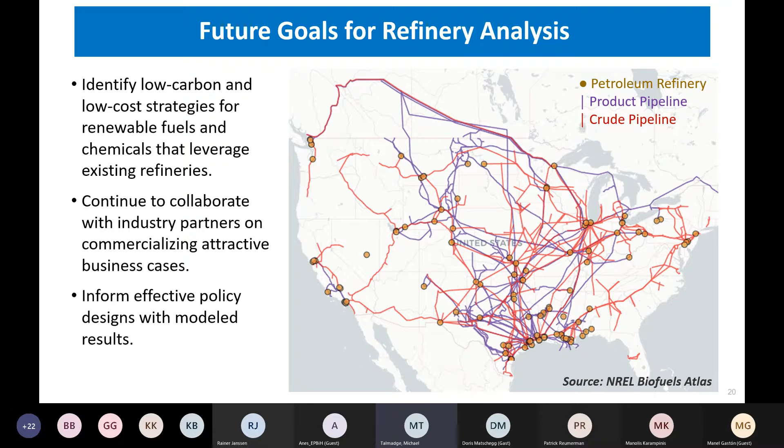Yeah, we have a lot of collaborations with industry. I'm very thankful that those relationships are beginning to come to fruition, because they are really proving valuable, and I hope will help with commercialization in the near term. And we think this kind of analysis can really help with informing effective policy design. So we'd really love to start having meaningful discussions around utilizing this type of analysis to assist in policy design.

Okay, so right now, obviously, we focused a lot on the FCC, but we've got all of these emerging technologies that can produce different bio-oils of different qualities that have really different benefits in the refinery when you feed them. And looking beyond just the fuels is important. We have olefins and aromatics and other chemicals that we're going to need to produce. So let's leverage the refineries to do that as well.

I've focused on economic analysis here, but the co-optimization integration of environmental and economic calculations is absolutely imperative. So that's the direction we're headed, to really make cost of carbon part of the economic optimizations. We're focused on hydroprocessing. We'd love to move into other insertion points. The resid FCCs are interesting, delayed cokers, fluid and flexi cokers, and certainly there's this very low sulfur marine fuel evolution that is taking place. So how can we utilize these models and this type of analysis to help with marine goals as well?

And then lastly, we're really focused on trying to figure out what the best allocation of all of our bioresources and circular feedstocks might be. So it's a very complex math problem. We've got lots of emerging technologies that can really help, and we've got a full slate of products that we need to deliver. So understanding how to produce those products from a very diverse slate of feedstocks and an interesting mix of emerging conversion technologies is a very cool optimization challenge. And so that's where we're going to spend lots of time going forward.

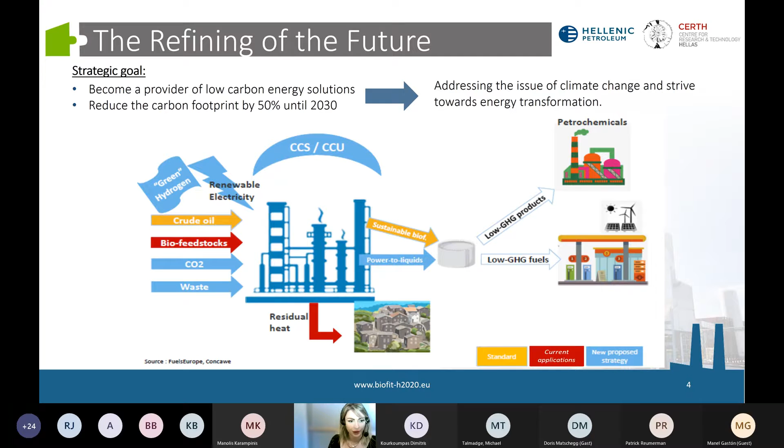Dimitri, if you can proceed to the next slide please. In this scope, we have developed a strategic research and innovation scheme during the past years. We have participated in many research projects regarding energy issues. These projects are not only focused within the Greek territory, but we're also involved in many European projects, including Horizon, Life, and others.

We have formed a team that defines and proposes research projects according to the strategic vision of HELPE. Our areas of interest are, first, the reduction of CO2 emissions, digitalization in the refining sector, the development of low carbon fuels, energy storage, everything involved with renewable energy sources, and e-mobility issues.

We can indicatively refer to some projects we've been involved in over the past years, categorized in the area of biofuels. These include HYCON, Circ4Bio, AlgaFuels, B2BioRef, and AlgaBiofuels. The main concept of these projects is mainly the development of second generation biofuels, where we're mainly the end users.

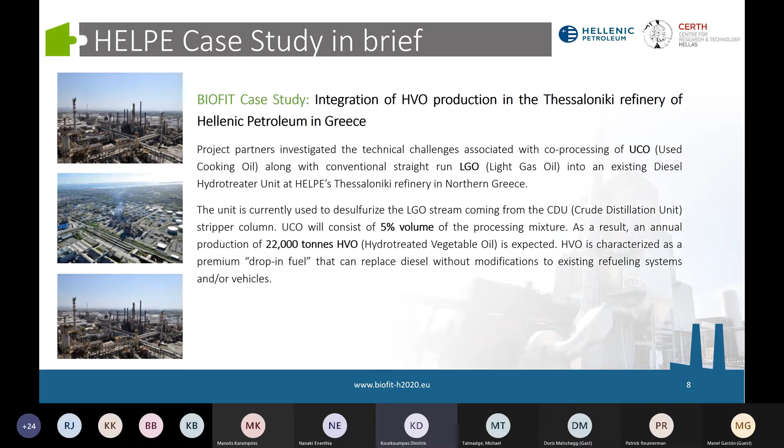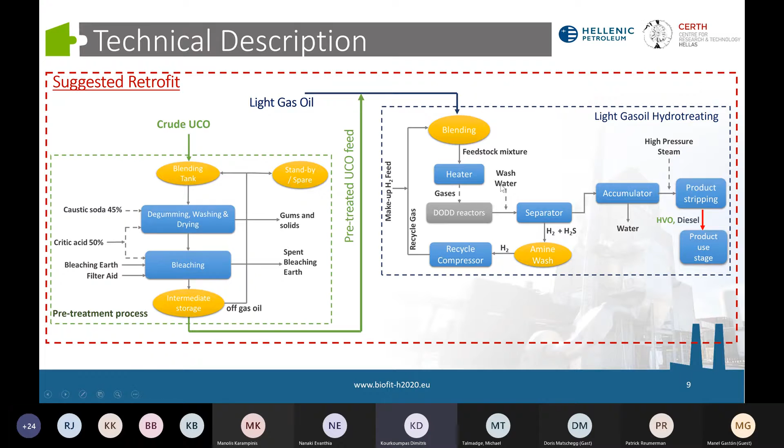Regarding the technical description, the methodological approach that we follow involves the mass and energy balance carried out for the current situation, the light gas oil hydrotreatment system unit, while in identification of the requirements of the suggested retrofit for co-feeding used cooking oil to a hydrotreatment unit have been defined. There was discussion and identification of the existing equipment and which are the new items that should be installed at the facilities of LP.

Then about the supply chain assessment and market analysis, here BEST was the main partner. The methodological approach applied was first of all to identify the UCO quality and UCO prices, with emphasis on Greece and the related legal framework. These are the main issues we discuss within this report.

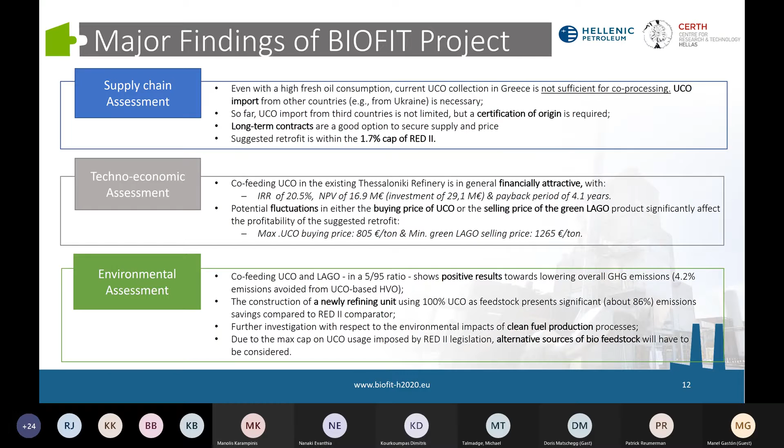is the location for UCO collection points. We don't have central collection points from households, so this is quite a barrier for this type of investment, along with a lack of knowledge on the environmental effects of dumping versus collection of UCO.

There is uncertainty about the income for collectors due to fluctuating UCO selling prices and supply volumes in the professional sector. The traceability system for collectable UCO, especially amounts from households, is not well known. There's a lack of infrastructure and fuel quality standards, no well-defined political framework regarding UCO import and quality standards, low collection efficiency of UCO from households due to lack of logistics, and a lack of regulations in the legislative framework in Greece.

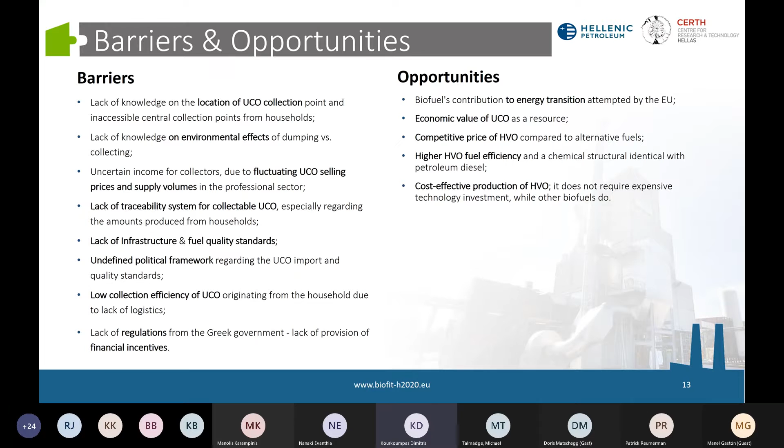That's all from our side. Thank you, and of course we are at your disposal for any questions that you may have. Thank you very much.

Thank you. It's very nice to see the results of the case study, and what we see is that economically it's quite feasible. But as we see with quite regularity, the feedstock availability and the way in which you can treat it and certify it is a very important point of the entire value chain, and it can sometimes be a limiting factor. I'm sure during the questions we will get back to that.

For now, I propose that we continue first with the third presentation on the second refinery case study, about the Total Energies refinery. Gail, are you there? Okay, I don't hear or see Gail. Maybe she will come back later.

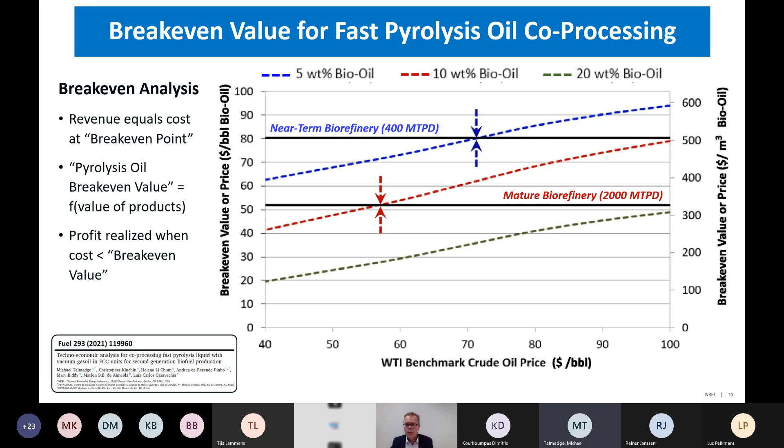Are there any more final questions? Patrick, thank you very much for having me. Yeah, okay, thank you very much.